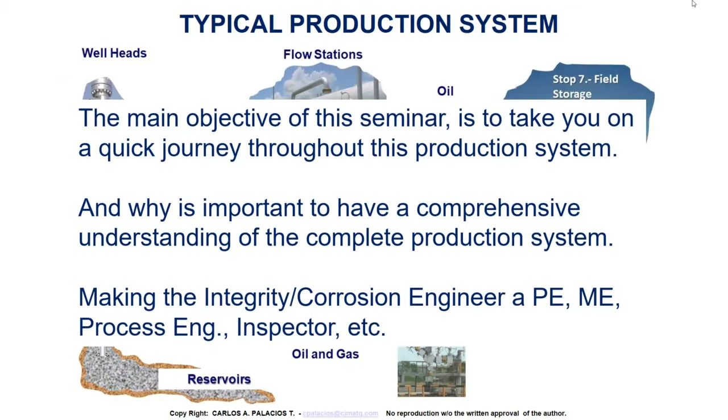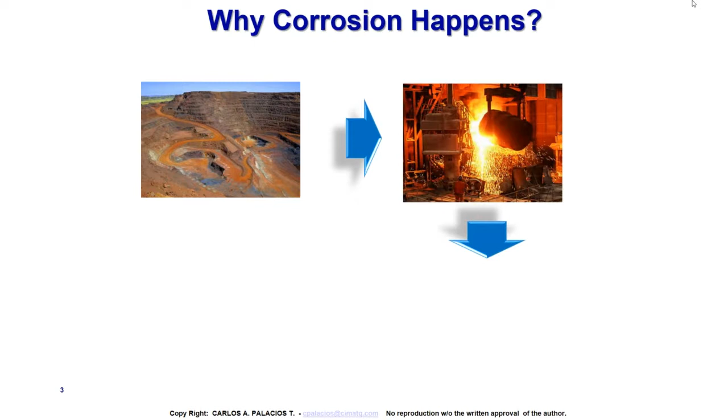So why does corrosion happen? First of all, corrosion is a natural process. It happens because we take iron ore, which rests in nature at its lowest energy state, and then we put a huge amount of energy into it to produce a piece of pipe. That piece of pipe is full of energy, presented by charges on the surface of the material, internally and externally.

So when we think about energy - if I go to a piece of pipe and hammer it, that place where I hammer it has a higher concentration of energy, and that area is going to start corroding faster than the rest of the pipe.

When our drilling friends are jogging pipes together, the areas where we damage the pipe are where corrosion is going to start. Then we have the tubing - corrosion happened, why? Maybe we can't do anything about it, because of how we're turning the pipes, or because the pipes are beautifully transported in trucks and then dumped in the field. Every location that pipe hits a rock is an area where corrosion will start, and we won't know it, because we don't have exact tracking of how things happen.

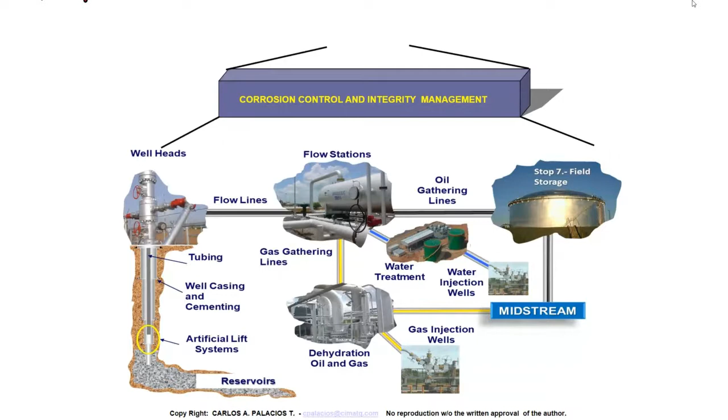So think about energy. Corrosion is an electrochemical process - we have a lot of electrical stuff and chemical stuff, and they both compensate each other. Electrically, a bunch of things can be happening, but if it doesn't happen chemically, they balance each other out.

One of the things we have to do, as I always say, is have a helicopter view of the system. If we wear blinders trying to tackle what happens in this gathering line, maybe I can't achieve it - I'll spend a heck of a lot of money. Looking upstream instead, I could focus on how that separator is operated, because I may have water in my oil line due to bad separator operation - liquid carryover in the gas stream, and liquid carryover with water means corrosion. So looking upstream is always important - that's why the helicopter point of view matters.

So ideally, you blame it on the guy upstream. If you're here, you blame the operator. If you're here, you blame well services. And if you're here, you blame the reservoir. So we go back to the reservoir - but we need to understand what's happening there. That's where our journey starts.

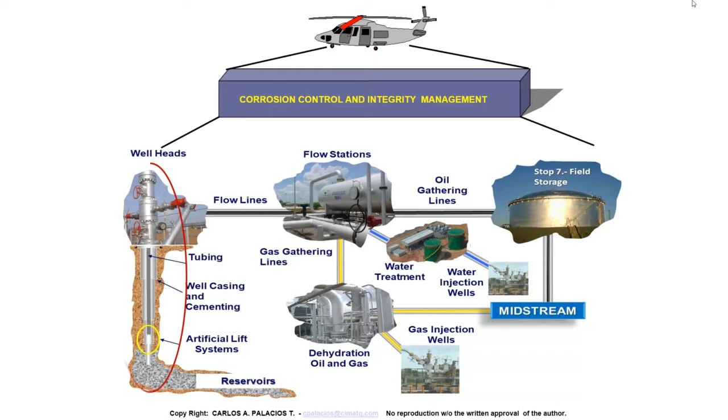Starting at the reservoir, well completion and well operation - that's one of the things we look at for well integrity. At the end, the word integrity means a lot - it means working as an integrated approach, as we were discussing earlier. In many companies, well services don't even talk to maintenance on the flow lines, or to the operator on the flow stations. They all work in silos.

I had the opportunity of working with the DOJ, the Department of Justice of the United States, due to the failure of the pipeline in Alaska that happened in 2006.

One of the things that operating company was doing—we all know who they are, but I'm not going to mention it—is they were working in silos. Our objective through the DOJ was to see that they follow an integrity recipe, because it was part of the court ruling, since they went to court.

So they would follow an integrity process and work together within each department even. So when we talk about integrity, we have to think about what happens from the point of view of the organization, starting with the reservoir. The reservoir characterization is important for us corrosion engineers, because we need to know how you guys are managing the reservoir. What are you thinking about it?

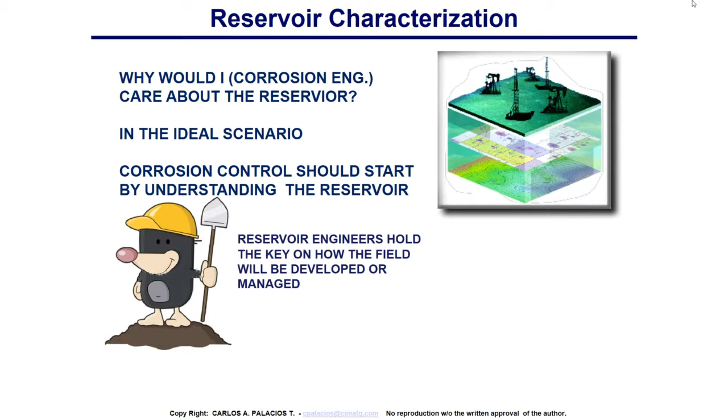Why would I care? Because in the ideal scenario, corrosion should start by understanding the reservoir. How do we manage that reservoir? How is it going to be developed? Because whatever you are thinking down there in your little cocoon is affecting whatever is going to be on the installation. How you develop that reservoir is going to affect the installation. Are the installations prepared for what you are thinking?

So let's inject water to increase productivity—then how about integrity of the installations and corrosion issues? And then all of a sudden, well, what integrity? What corrosion? What are you talking about? Yeah, we've got to be thinking about what's going on. How is that reservoir managed?

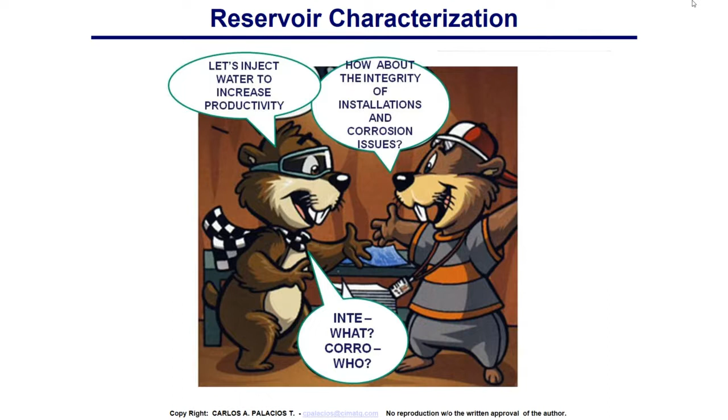Have you ever thought about a corrosion engineer sitting next to the reservoir guy, to see how things are? What is he thinking? What is he envisioning? And will those installations be accepting of whatever he's envisioning? Never—you never think about that. But that's where things have to start.

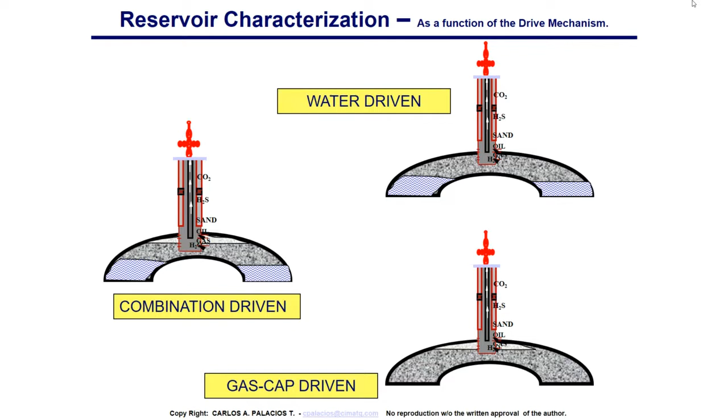So when things go bananas, then you go, help, what am I going to do? Maybe it's too late, maybe not. So for reservoirs, we need to understand whether it's water-driven, a combination, or gas cap. Why? Because I want to know when water starts in my completion, when the water is going to be in my completion, what's happening in this area, from the point of function of the fluids.

Is it a saturated reservoir? Is it undersaturated? Is it gas or retrograde condensate? Why do I care about that? Well, because if it is a saturated reservoir, what's going to happen? From the get-go, right here, I may have issues of corrosion, because now I have free water with free gas and oil.

When I am in undersaturated conditions, the oil goes in, maybe in an emulsion with the water, but still the gas is entrained in the oil. So the corrosion is going to be a little bit controlled. But somewhere along, I'm going to have the bubble point, and somewhere along, I'm going to start having corrosion. So I need to know where I am in my reservoir to see how I approach it from where I am.

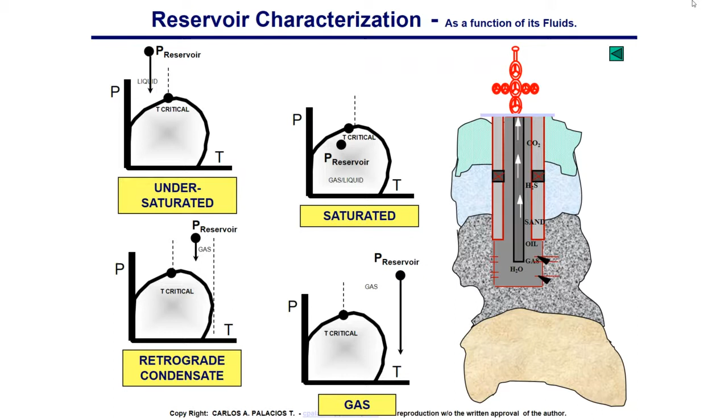Or by the fact that the well is declining, I can be moving from an undersaturated to a saturated state. When is that reservoir going to reach saturation? Because when that happens, I, as an integrity person, need to be aware of that.

So here are some examples. We have a declining curve, what is expected production, and as I just mentioned, undersaturated—but as I go, it becomes saturated, and then I have corrosion issues.

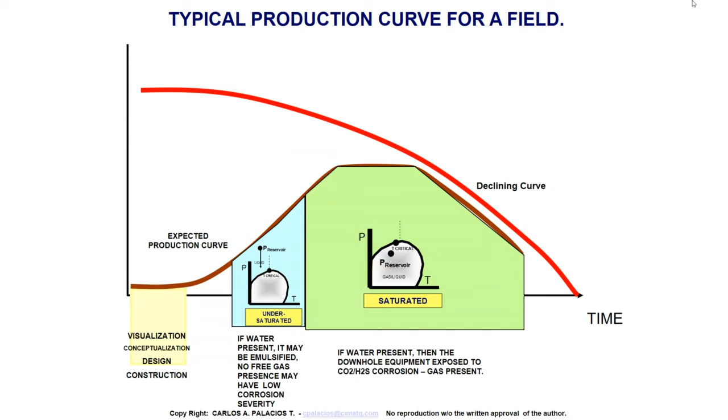Same thing from the point of view of the characterization of the reservoir. So right here, when we sit with the reservoir engineer, in the visualization stage, is where we can control corrosion more as we develop this field. Because we know that this may never reach there—reservoir engineers do their best thinking, well, I'm going to reach this production. That means that we as engineers have to define facilities to carry this huge amount of oil.

But it turns out, oops, the reservoir guys made a mistake. It's not going to reach here, it's reaching here. Now I have this huge pipeline, a huge separator, and I'm going to have huge issues of corrosion. And that's what I need to know, because from the get-go, I can control even if I have a 36-inch pipeline with only 3 or 4 barrels of oil. I need to know that.

So as we move from the point of view of water, as we move in time, I need to see where that water gets into the completion so that I can take action. So that's basically what I stated before.

So that's all I have to say now for the reservoir. Now we move to the completion part.

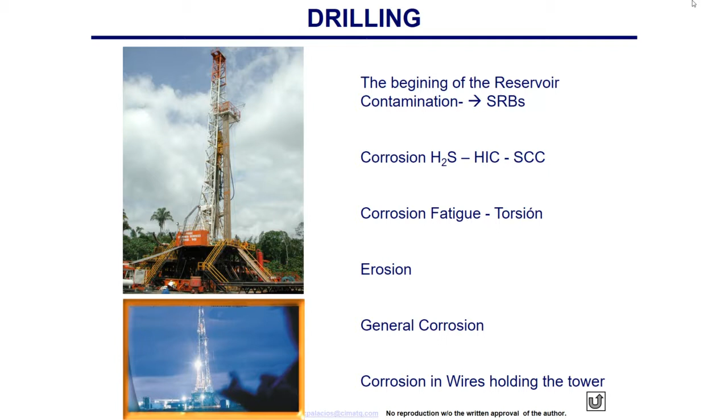So, I mean, this is all I'm going to talk about drilling, but in drilling, all that equipment is exposed to a lot of corrosion, a lot of external corrosion, and then I put that drill in there and I have a failure. What happened? Well, let's see the history of where that pipe is coming from.

Cementing, well, from my point of view, cement is the first barrier that we have for the casing. I mean, if we look at concrete structures, reinforced concrete, the rebar in the concrete is well protected because of the cement outside.

The pH of the cement, similar to the cement we use in the oil industry, is around 10 to 12 to 13. At that high pH, the rebar, the casing passivates, and therefore corrosion is somewhat controlled.

But what is the quality of this cement? Is this cement completely all the way around my casing? I don't know. So that is the first barrier. What is that quality? Because much of the cement is going to be exposed also to aquifers, so is that quality going to be protecting the casing externally?

Okay, then when I have the cement all the way to the perforations, I perforate, I'm cracking the cement, and I can have corrosion around the perforations. Okay.

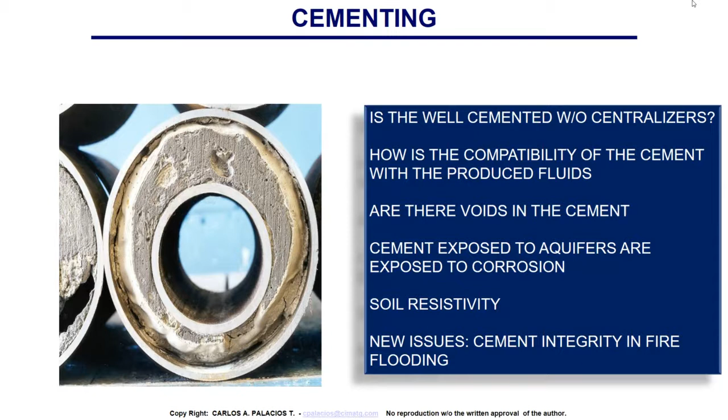Of course, outside I could say, well, I can protect it by other means. Here is an example of a casing. This is the cement, and what you see here is the wellhead.

This happened in the north of Peru, in an area called Talara. In 1999, due to the El Niño phenomenon, there was a huge mudslide. And that mudslide carried mud, and of course, there was a well here with a sucker rod that went with the mudslide. So whatever was left was this cement, and this is a close-up of the cement.

The question is, was this cement cracked before the mudslide? Because if it was cracked, corrosion is going to be happening underneath. Same thing happens in Florida on our bridges, or in the US in general. We use salt, and salt depassivates the steel, creating corrosion, and that's why the bridges and infrastructure in the US are in terrible shape. It's because of cracks in the cement that corrosion starts happening. So the question from a well perspective is, how is the integrity of my cement? How well can I qualify that quality of the cement?

I'm talking about SRB, but there are many other types of bacteria. So some of the challenges include lack of correct water treatment pre-fracking. We normally use acids, gels, friction reducers, surfactants, but how about for corrosion? How about for bacteria or scaling?

I know there is some research from some companies in Odessa where, in the proppant, they are using biocides embedded into nanoparticles so that when they go into the fracking, as they are producing them, the inhibitors will be working for a longer time. That's an ongoing evaluation.

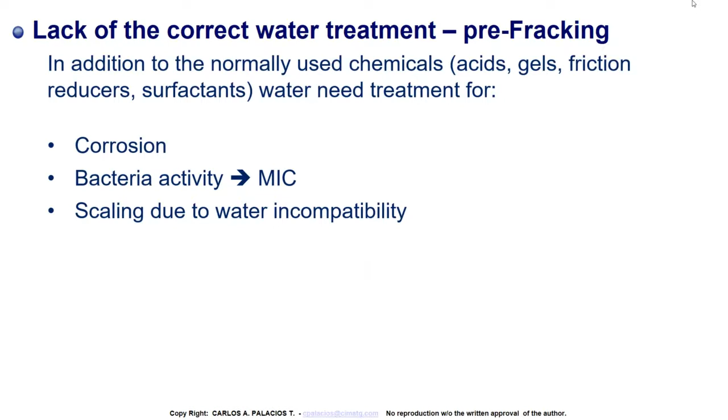And this is before we inject the water into the wells. So the challenge is correct water treatment. In addition, on the fracking side, I can treat the water very well - I can use an oxygen scavenger.

But then we go into the mixing table where we mix the water and the sand. That is open to the atmosphere, so oxygen gets in. Then we inject it into the reservoir and we have a lot of corrosion issues. Perhaps oxygen is what I'd worry about less, because it eventually gets consumed - but as it gets consumed, corrosion is taking place.

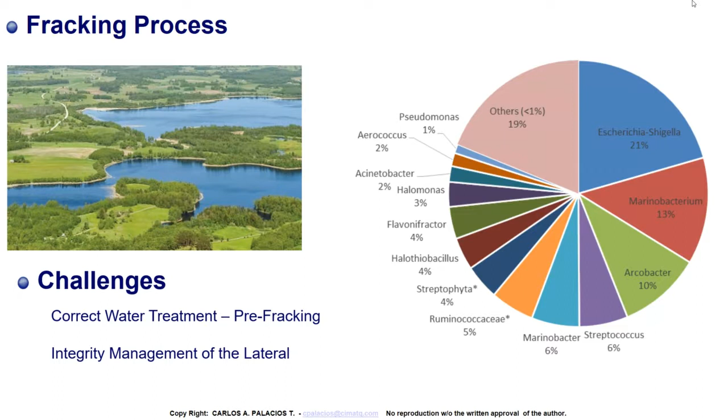So that's a little bit on the well completion, okay? And I could keep talking more about it.

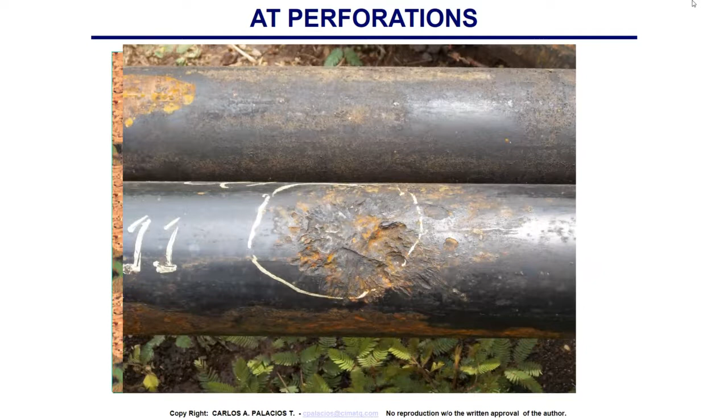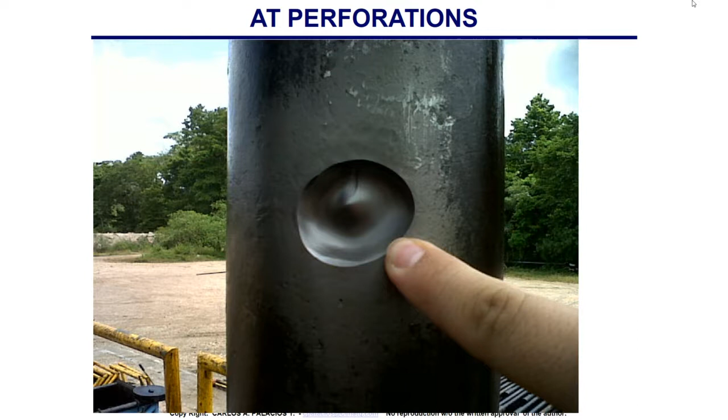Then on the wells - well, we mentioned perforations. Here is an example on an unconsolidated sand, right in front of the perforation. That is textbook erosion, right in front of the perforations on an unconsolidated sand. Look at that - textbook 90-degree impingement, with a little peak in the center because of the way the sand was directly impinging there. You can even see it follows the perforation profile of the different holes.

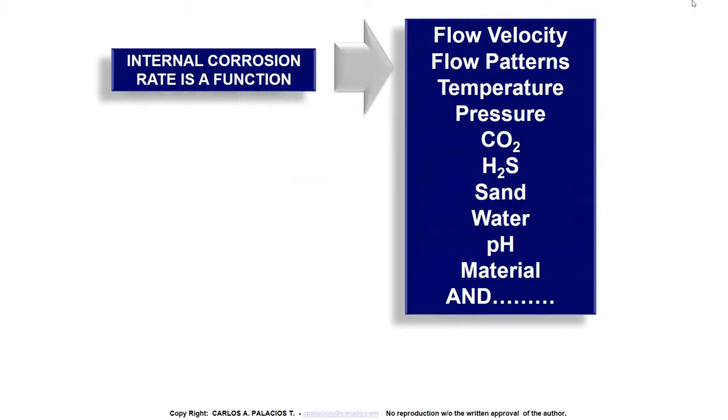I do apologize for not using precise nomenclature, you petroleum engineering guys. So for naturally produced wells, when we think about internal corrosion, these are just a few of the variables that affect corrosion - I counted 36 factors.

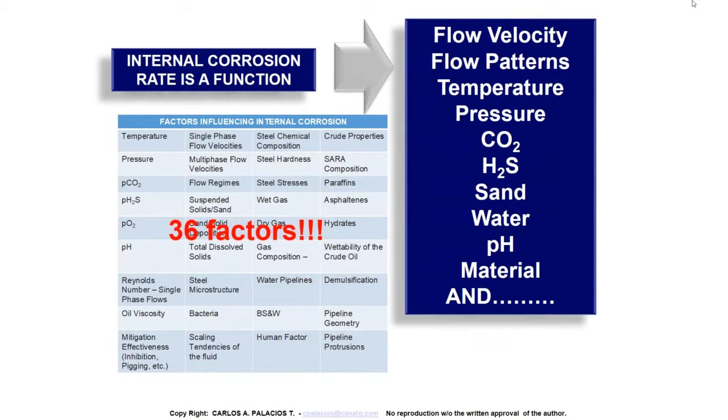Put that in a mathematical equation to predict corrosion - it's like what you guys do for reservoirs, because you've got so many variables to characterize a reservoir. In corrosion, you have 36 variables that affect the corrosion rate. Try putting that in a mathematical equation - it's impossible, because then there's asphaltenes, and oil from the same field but a different formation is a different type of oil. It's very difficult. So when we do predictions of corrosion rates, since we don't have true mathematical modeling, we need a lot of experience input.

So here is, for example, part of what I was mentioning - it's very important for me what many of the production engineers do.

All the variables that they use to do their production engineering optimization: pressure gradients, temperature gradients, velocity gradients, superficial liquid gas velocity, flow regimes, because those are the minimal parameters that corrosion is affected by.

Then I may have this type of corrosion behavior on a specific well, and from the bubble point onwards, because below the bubble point, all the gas is dissolved in the crude oil, and corrosion is basically negligible. Once the gas starts liberating at the bubble point, corrosion starts.

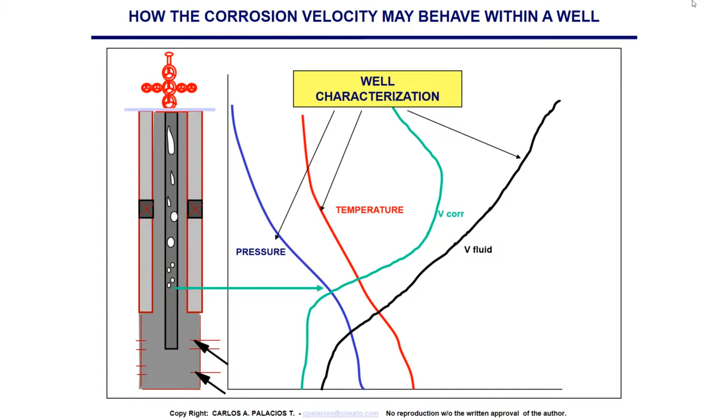Of course, with water. Outside the refineries, water is the main element for corrosion to happen. No water, I don't want to say no corrosion, but I say negligible corrosion because I don't believe there is never no corrosion. Inside refineries it's a different mechanism, but outside refineries, no water means negligible corrosion.

Here is an example of the flow modeling. This is a typical flow modeling. Here we have the water dew point, and this is data from a caliper tool that they did in one well in Peru in 2005 that I did some work on there. See, all gas.

At the water dew point, we started seeing this was mist flow. We started seeing corrosion. And then as we go, this is the profile of the well. As we go in this one, the flow regime changed from mist to slug because of the inclination. Look at the high corrosion rates, here almost 80%. It was a well that had a leak.

Okay? So this is production engineering stuff. That's why coupling production engineering with integrity is very important.

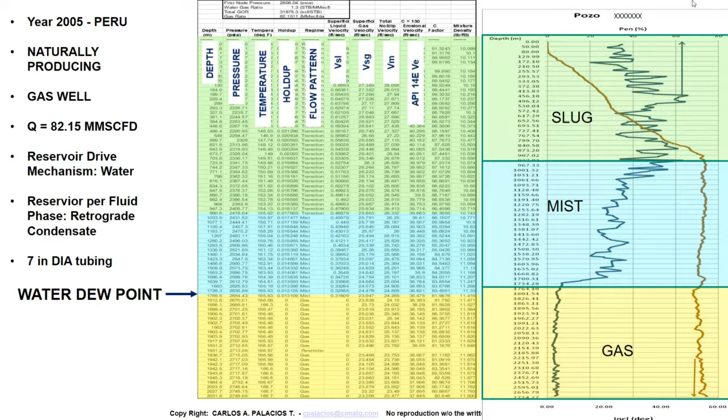Of course, as I mentioned, flow regimes -- every single flow regime has issues of corrosion. Corrosion is very much dependent on the mass transfer process. So the higher the turbulence, the higher the corrosion rate is going to be.

Even in our rod pumping units, most of the flow is churn flow. Churn flow is very corrosive because of the mass transfer -- think about this, it's a lot of turbulence, a lot of mass transfer. But in a shallow well, who cares? Let's take the rod out, put a new rod in, because it's only peanuts, but there is serious corrosion.

In horizontal wells, slug flow is terrible.

Think about the sea. When you go to the sea, you're in Cancun. Oh yes, I'm in Cancun. Now it is 10 a.m. in the morning. The sea is flat. As the day goes by, then you start seeing the wind picking up. And as the wind picks up, then you start seeing the waves. And the waves could be, after around 3 in the afternoon, after you had quite a few beers, you try to go in the sea, and then the waves will roll you. If you are with your kids, you'd say, watch out, it's going to roll you.

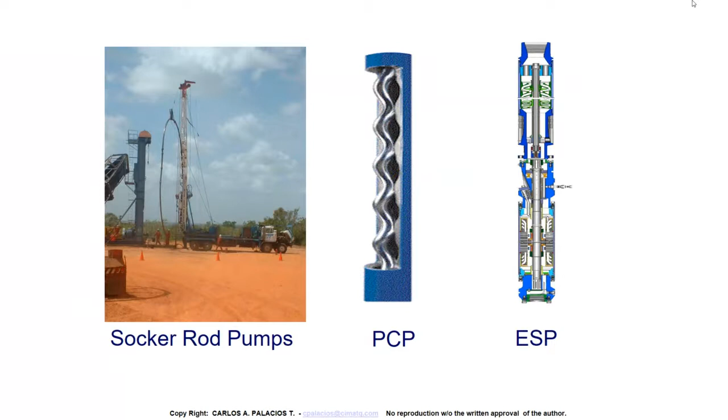So from the point of view of production methods, as I mentioned, there are sucker rods. I'm not going to have time to go through all of these, so I'm only going to concentrate on the top 3. Okay? Sucker rod pumps or PCP pumps.

In the sucker rod pump, we have a rod going up and down. As the rod goes down, it moves in counter-current with the fluid going up, causing higher turbulence. And in the coupling areas, there is a restriction of the cross-sectional area, resulting in higher velocity and higher corrosion rates, on the rod as well as in the tubing.

How about the gas in the annular space? This is wet gas. As we go up, water vapor can deposit in this area, affecting the internal corrosion of the casing or the external corrosion of the tubing.

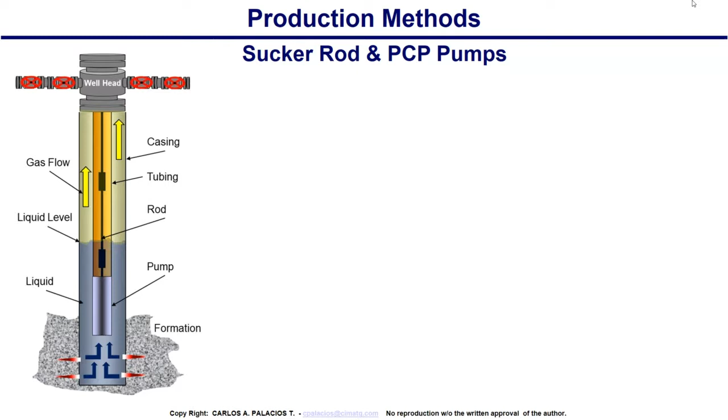How about through the pump itself? Through the traveling valve to the static valve, there is a lot of corrosion because of restrictions, and it comes with sand. This is a pump that, due to the drawdown, is going to be pulling sand also. So the sand is going to influence the corrosion rates. Okay?

So that's what I mentioned, also oxygen ingress through the stuffing box. This is key, maintaining this stuffing box, because this same action of the rod can pump oxygen into the well. Or in many cases, production engineers say, let's open the casing to atmosphere to reduce the pressure, to increase productivity.

But the thing is that this level moves. When it moves down, you are sucking in oxygen. When the level moves up, okay, so if you have a breathing well, now you have oxygen in, oxygen out, oxygen in, oxygen out.

Oxygen is the worst corrosive agent that we have in nature. It is 80 times more corrosive than CO2 and about 400 times more corrosive than H2S. Oxygen is the worst. Lucky for us that we don't have oxygen in the reservoirs.

We are lucky. But if we have oxygen in the reservoir, it's because we put it in there through the water treatment. Some of the water treatment we're going to talk about, we've got to be careful not to get oxygen in, because during the water treatment, much of the equipment is open to atmosphere.

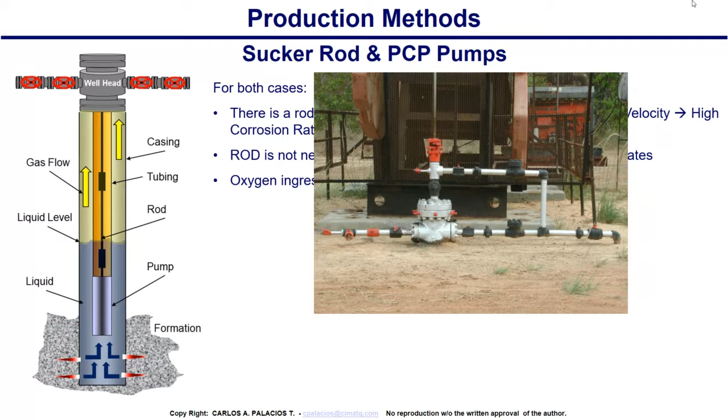So for sucker rod pumps, there are high local flow velocities at the couplings. As I mentioned, this causes high corrosion rates on the static valves on the pump, and then the rod can be wearing against the tubing.

What are you going to do there? There is no chemical that is going to help you minimize that. Well, but then we say, let's put a rotating device on the top that is going to be rotating the sucker rod.

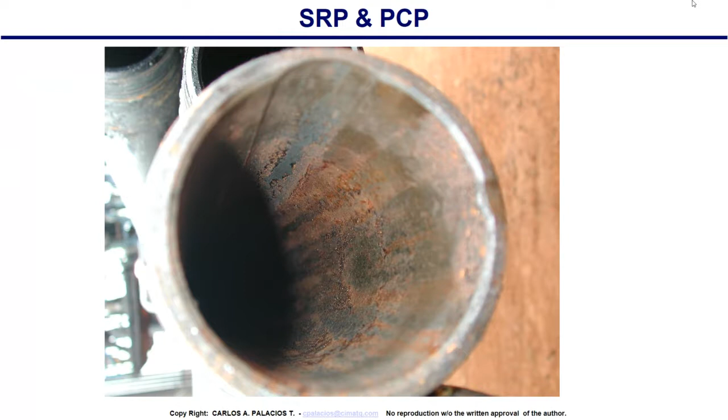That is basically buying time, because that's what's happening. I don't know if you can appreciate it, but we are basically rotating the damage all around the tubing. Okay, you are buying time, that's fine, but you are still damaging the pipe. Lucky that the rods are a harder material than the tubing, so normally it's the tubing that suffers more than the rod itself.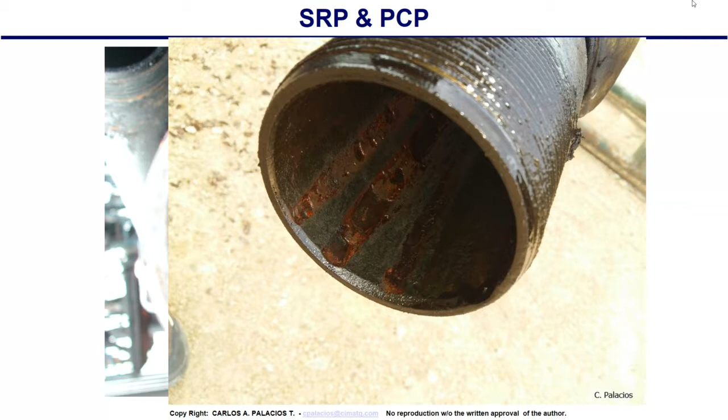Inspections, boy, I tell you, ladies and gents, when we started inspecting with this simple visual inspection of the rods, it's amazing how much money we saved the company.

Here is the company man on the workover. Okay? He doesn't care whether the rod is corroded or not. He will put the rod back into the well, only to find out that after a couple of weeks, it's going to be called back again because the well failed due to corrosion.

He's going to be very happy because he's going to have a job, a recurring job every 2 weeks, every 2 weeks, every 2 weeks. Since we started doing visual inspection of each one of those rods, taking them away instead of putting them back into the well, we extended the workover frequency from 6 months to a year, saving the company a lot of money.

Not only that, but these rods — I dare you to go to a warehouse of a company where they have the rods stored. They are just there, open to the atmosphere. Corrosion is taking place, and then you come to your well.

This is a brand new rod, let's put it in. Whoop! The well failed tomorrow because it was already corroded. Think about that in a continuous rod that is in tension. If this holder breaks, that rod goes like a spring, ready to go straight.

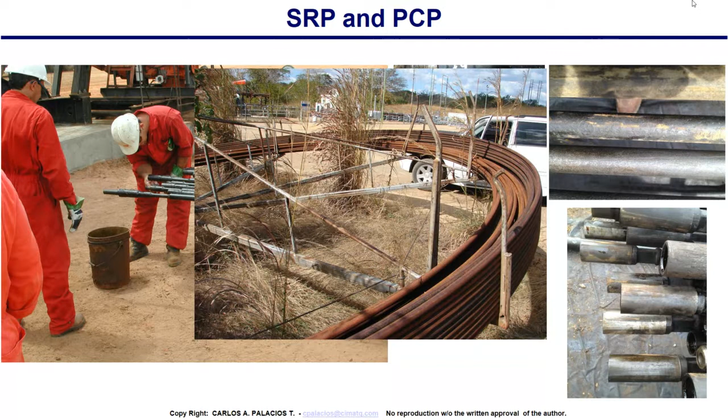That's why you have to ride a helicopter, so to speak, to understand that when you buy these continuous rods from Weatherford, which are the ones who make them, you've got to make sure that in their shop, even when they come from Canada, they are protected from corrosion in the ships, because it's going to go from Canada, perhaps running all the way through the Mississippi River, to the Caribbean Sea, to Venezuela or Colombia, and that trajectory needs to be well taken care of.

So, gas lift — is the gas lift dry? Does it have CO2, H2S?

We may be corroding the casing. In many cases we say, well, I'm going to treat it with a corrosion inhibitor, but I don't have any place, so I put the corrosion inhibitor into my gas stream. Very inefficient, but sometimes it's what we have. We don't have any other alternative.

ESP pumps, I love these ESP pumps. Here is a packerless well, so we have the motor. Of course, I'm showing here the motor perfectly centered in the production casing, but we know that's not the case. If I move it a little bit, there's a small space where velocities can be very high. It's a restriction, it reduces the cross-sectional area, higher velocity. That's why the motor casing is exposed to erosion and corrosion.

And scaling, because this is the hottest part. It's the fluid around that is cooling that motor, so scales can be forming on that motor. But if those scales become localized, you get corrosion under the deposit, or under-deposit corrosion.

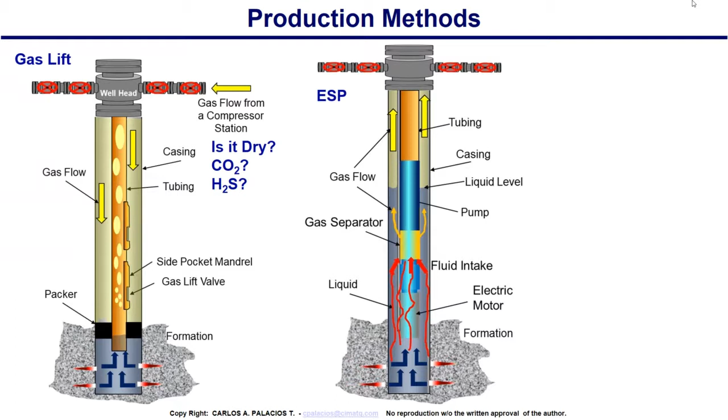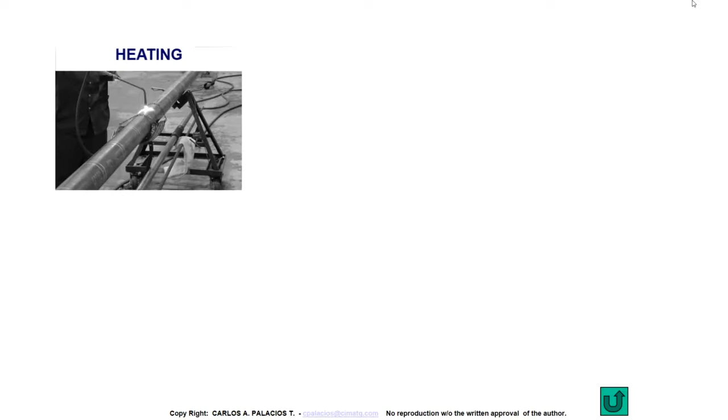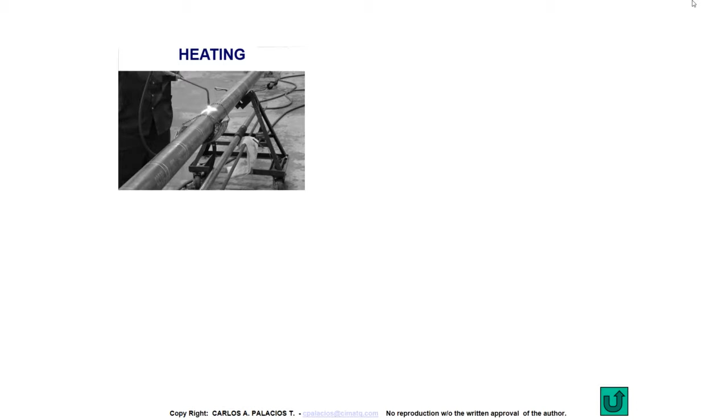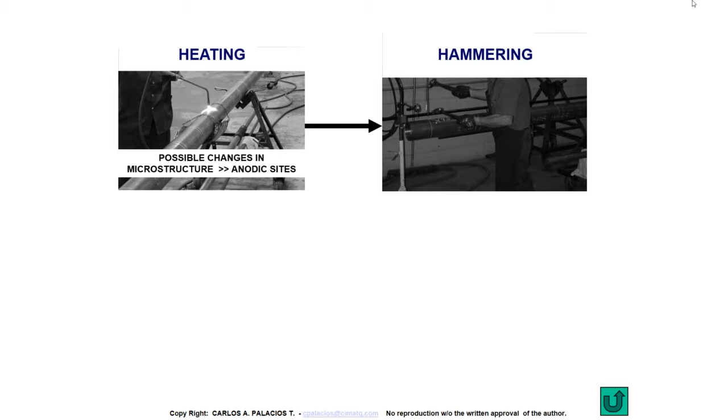They have this lady with a torch on the piece of pipe. This is a piece of pipe because internally they build the pump, they build the motor, they build the separator—they build it all. So they have the torch. Why do they do that? Oh, because I want to straighten the pipe. Okay, right. Then it goes to another department—this is an old guy with a hammer. When it goes from here to there, they've already put the stators inside the casing, inside the piece of pipe, and this guy with the hammer is hammering away to align the stators inside the tube.

Look what they did—you see the marks of the torch here, and look at the marks of the hammers right there. I mentioned to you at the beginning, if I hammer a piece of pipe, that is an area where corrosion is going to start. And lo and behold, this is a highlight of that—see the torch marks plus the hammering.

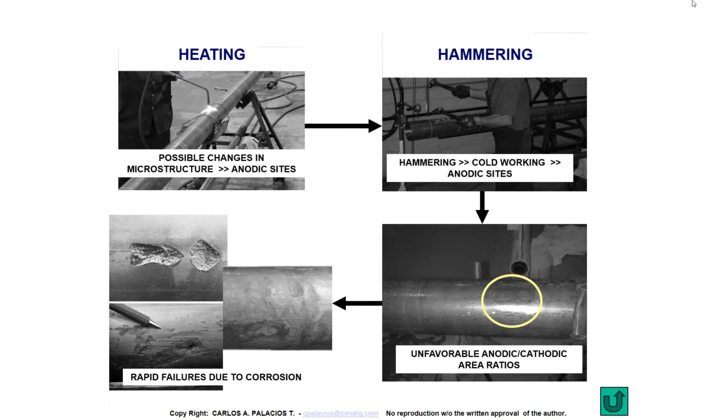And this is how we get the corrosion. What a casualty. Of course, here comes this guy from Venezuela telling those guys how to do the manufacturing of a pump—how can you do those things? You are damaging the whole structure. Of course, other manufacturers don't do that, but these guys were doing it. We even had to recoat with special metallic coatings all this stuff, and it didn't work very well. See, this is the highlight—very deep. And there was a leak of oil from the motor.

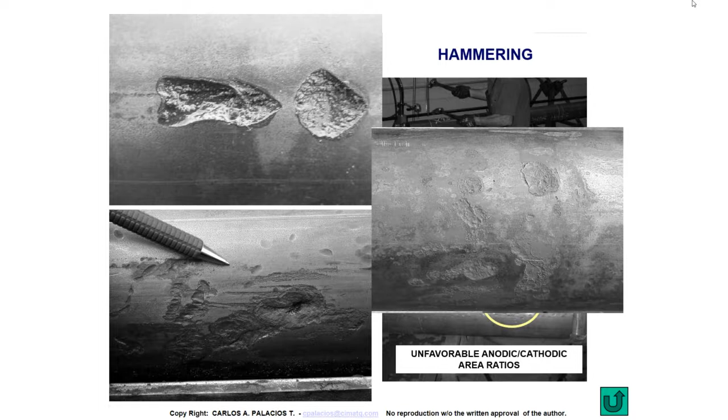Okay, I hope I'm not boring you. I don't think so. Just, if you need some toothpicks, I have a bunch of toothpicks around here, so if you need some.

So then, drilling guys, completion guys, whenever you do a completion of the wells, please put a capillary string down there. It doesn't matter whether it's not going to be used today, but eventually it's going to be used. And it's not true that you can convince management, once you're in production of a well, by saying, hey management, I need a workover to pull that tubing out because I need to install a capillary string to treat downhole. You know what management is going to say? You are fired.

So please input it from the beginning in the completion. When you do a completion, design it with the proper location to put capillary string downhole. I'm doing some consulting job for a company in the Middle East. Every single well in this particular field has been completed with a capillary string downhole. They are not using it right now because they are producing zero water. I don't believe that either, but they said it's zero water, and they don't have any corrosion issues. But they know that eventually they will because they are injecting water. So they have the completion ready for that.

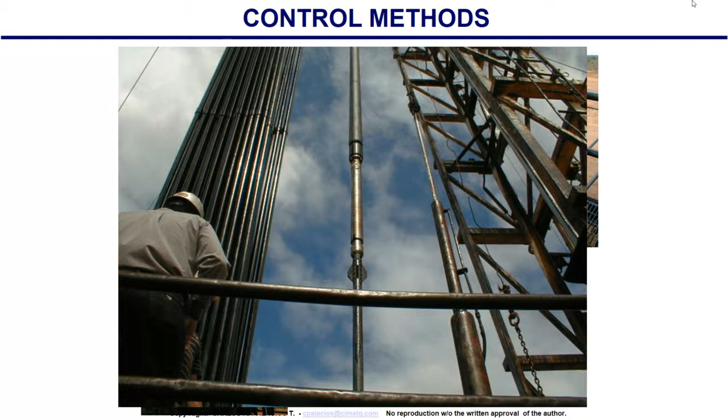So please, it doesn't cost a lot more. This is peanuts compared to losing a completion, losing a well. And at the bottom of the well, use a dispersion device. Chemicals work, ladies and gents. Corrosion inhibitors work. Scale inhibitors work. Paraffin inhibitors work. Asphaltene dispersants work. But you have to deploy them correctly. So please complete your installations with capillary tubing.

So, see, here is one case. This is the capillary. They have a little check valve and an elbow right here. Of course, one of the things when you leave this like this, without a specific dispersion device, is that the solids coming in here can make that check valve fail in the open position. When that happens, the fluid going through it behaves as a pitot tube effect and sucks all the chemicals from the surface. So on the surface, you also need to have some proper devices so that won't happen, because that happened in many cases, and I would blame the chemical company. You didn't fill the tank today. I filled it yesterday, well today it's empty. Well, it was because of that type of effect.

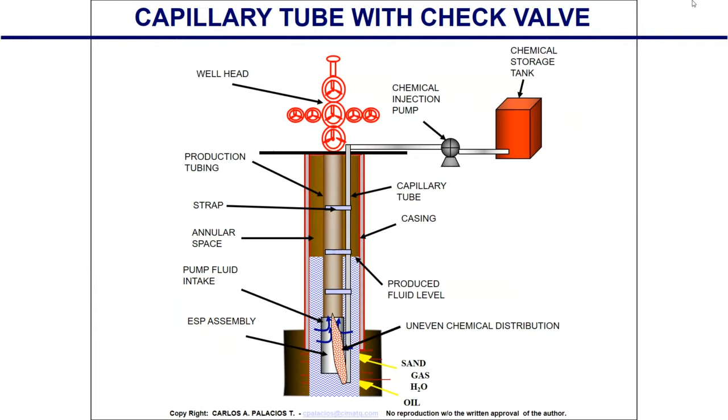And here, for ESPs, the capillary tube already comes with the same armature as the electrical cable that goes to the electrical motor. So they are embedded in there. So don't think about it, just do it. So once again, we need a proper dispersion device because the chemical may channel, and you may be thinking, well, I'm protecting my equipment, and not necessarily. So that's why, because this is what may be happening. And then scaling can be happening because it's not mixing properly. So that's why you need a proper mixing device here so that the chemical mixes. And that's the key for every chemical to work: proper mixing.

And don't ever do this, ladies and gents. I'm going to treat it on what they call the backside. The backside means in the annular space. Of course, you need the well, first of all, to have no packers. But doing this, the same chemicals, especially asphaltene dispersants, are extremely corrosive because they have very low pH. Biocides have very low pH, some around 2. Corrosion inhibitors may have low pH too, but it's a corrosion inhibitor, how can it be corrosive? It can be corrosive. Scale inhibitors can be corrosive. So any chemical that we take can be corrosive.

And then, let's assume that it's not. Are you really going to think that I'm going to have this magic chemical that is going to go all the way in countercurrent with the gas, going down? When it reaches the water, it's going to disperse in the water very finely until it goes here and then up the tubing. Ah, come on, it's not going to happen. And this is what may happen from the corrosion point of view.

Lucky for us, it happened very close to the surface. But if it happens even further down, then you lose the casing. And then repairing a casing, I don't know, you guys know more than I do. I understand that sometimes you have to kill the well. Sometimes you may repair.

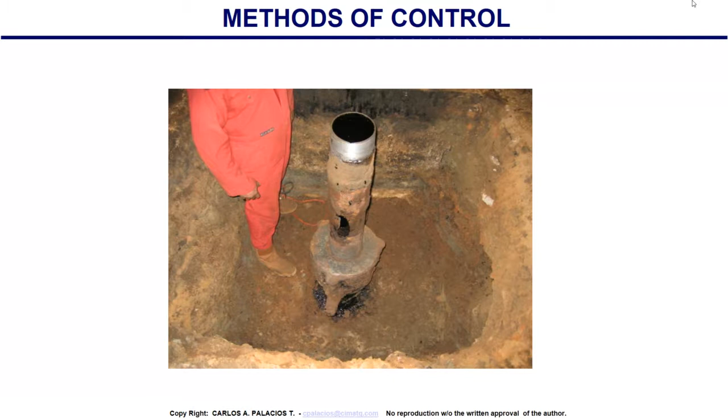So it's important to have a dispersion device. So we need to complete wells properly, as I mentioned.

Corrosion resistant alloys, ladies and gents, they are not immune to corrosion. Corrosion resistant alloys work very well within the specific integrity operating window.

I have a well with no H2S, use 13 chrome, no problem. But now the well started to become sour. Say goodbye to your 13 chrome, because the H2S and 13 chrome, they don't like each other.

Or the salinity changes, if there is an increase in the salinity. Salinity is the enemy, chlorides is enemy number one of any corrosion resistant alloy. So they have their own integrity operating window within which they work very good. But that doesn't mean you can sleep at night saying, okay, I'm not going to have corrosion anymore. Things change. Souring of the well, water changes, things change.

Even duplex - hey, our friends from Oman, if you look at the installations there, beautiful duplex all the way around, from the well to the surface, beautiful. And they have a lot of issues of corrosion on the wells.

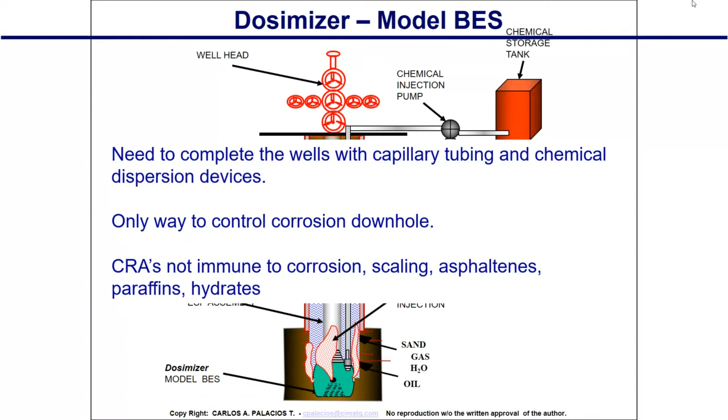So in that specific case, when you are welding that, you are removing that passive layer. Externally, it's not an issue because you come back and refresh it and rebuild that passive layer. But internally, how do you do that? So now you have a beautiful material, expensive, and still you have corrosion.

So wellheads are the most hydrodynamically unfriendly equipment in oil and gas operations. It's just a bunch of valves. This is truly 90 degrees, and then we have the chokes.

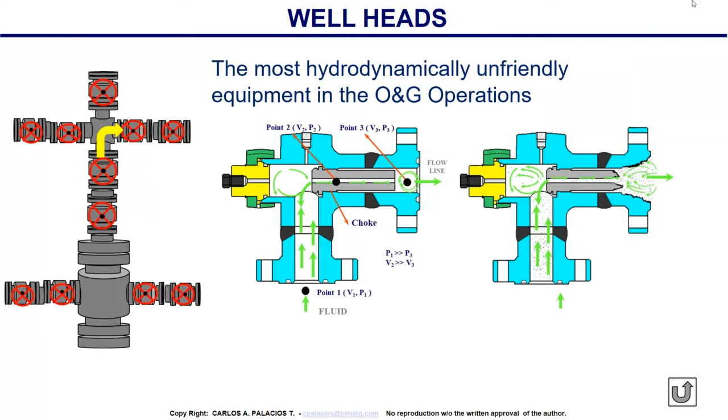And depending on the conditions of the chokes, hey, we had wells with 10,000 psi here, 12,000, 10,000 psi and 1,200 psi downstream of the choke. Imagine the huge velocity across the choke - Mach 1 velocity. No matter what you do there, it's going to destroy the chokes and the choke box, as we see there.

And even the choke box, that is a massive amount of steel. This choke, like that, it goes anywhere, and then you have a mess there.

Multi-phase flow line, now I'm out of the well. Beautiful challenge. This, in my experience, was one of the biggest challenges to manage corrosion - multi-phase flow, because of the hydrodynamics in them, the turbulence, and sand, and bacteria, and water.

So in that particular field, they came up with a wonderful idea: let's have a centralized processing facility for the oil. Here it is, this is the centralized processing facility. We have a multi-port valve here collecting fluid from different wells from this area, and then from this area, and then from this area. A 16-inch pipeline.

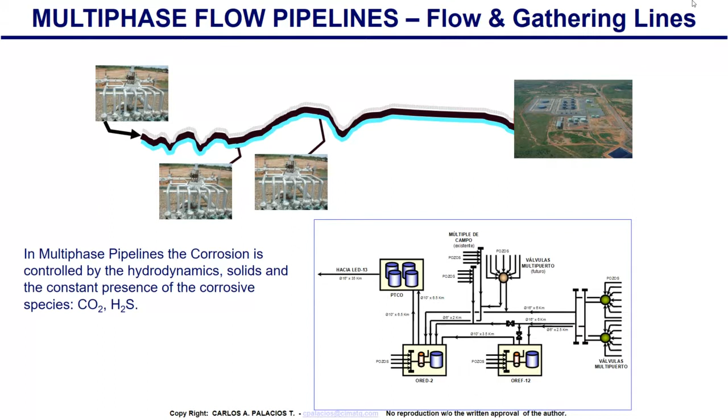So sometimes you gotta play the doctor and listen to the flow regimes on the pipeline. So really, this is just to listen, to corroborate if the modeling was correct, by listening to the frequency of slugging going back in the pipeline.

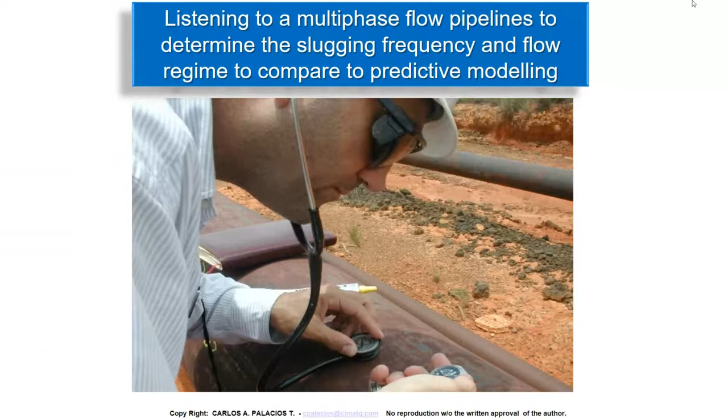Things to consider that are flow related: the effect of emulsion, and wettability. Who's wetting the pipeline? Is it the oil or is it the water? Very important. I remember when I was a student here, Dale Peters - I don't know if he's still around - he had a project looking at the hysteresis of the crude oil and the wettability. This is big now. There is huge research going on right now in PRCI, trying to understand and come up with equations to predict the wettability.

Here is the case, remember that mention about slugging? This is in Alaska, a 36-inch line. Due to a slug, and in Alaska all the pipelines are above ground because of the permafrost, and insulated, a slug just knocked it down from the supports. So that tells you the huge mechanical issues of slugging.

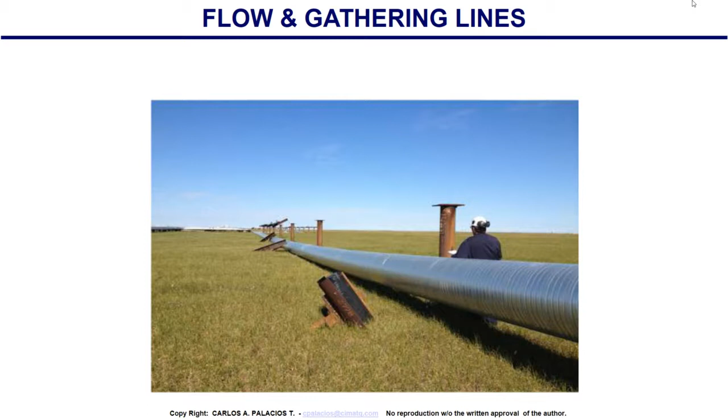Alaska is a particular deal because when they designed the field in Alaska, production was very high at that time. That's why you have these huge pipelines. They all insulated their lines because of the cold weather. But you know what they didn't do? They did not coat underneath the insulation. Guess what is the biggest trouble Alaska has right now? Corrosion under insulation, not even internal, corrosion under insulation. They didn't think of it because they said, well, Alaska is an Arctic dry environment. Yeah, but they forgot that the snow melts in summertime. And if the jacket is not well protected or has defects, water gets into the insulation, causing corrosion under insulation.

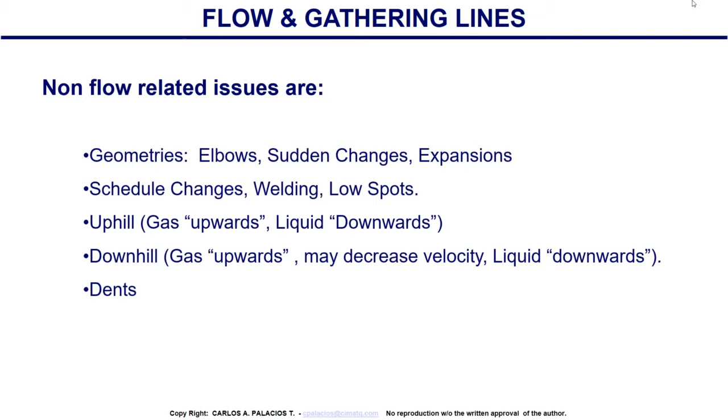Geometry is very important, we were talking about turbulence. That's why when we are designing systems, that's where we have the most powerful tool in the design to control corrosion. Avoiding elbows, changes in schedule, uphill, downhill, dents.

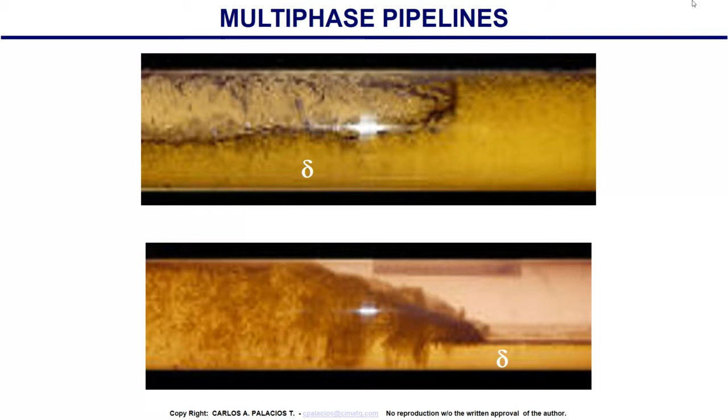Look at the turbulence. Think about when you go into the sea, there is a wave. What does it do? And the further you go down, the wave passes by, not an issue. But if you are close to the shore, the slug film thickness is like this, there is no way to hide, and you'll see how the sand is all shook up. So that means the fuller the pipeline, if I have a slug flow, from the point of view of mass transfer on the bottom of the line, is better because there is less mass transfer than if the slug film thickness is smaller.

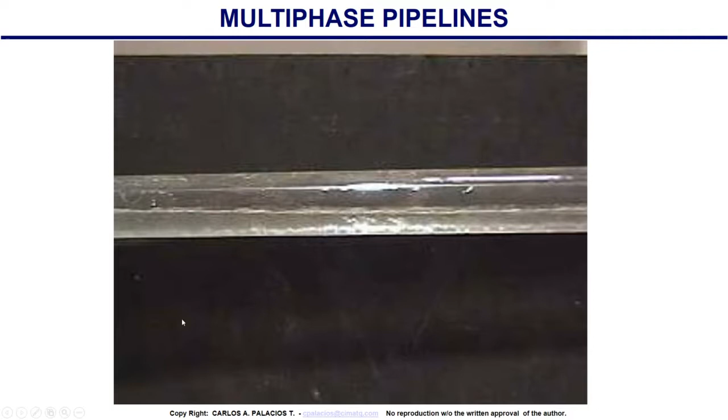Simple things like that. Here I quickly want to show you, I don't know if I'm going to be able to get this going. Well, it's not going to work. Well, this is a video of a slug, it's not working.

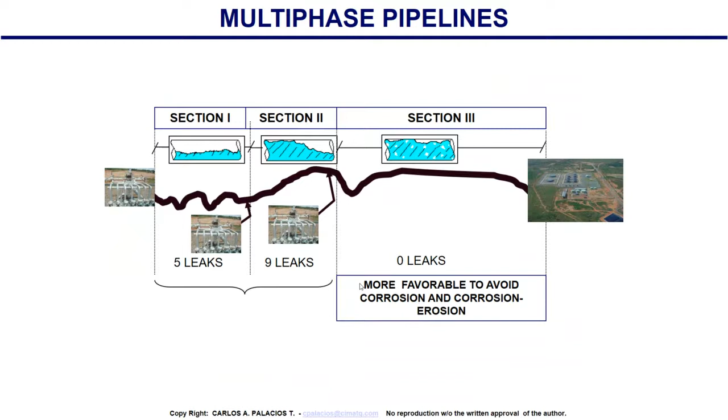So I mentioned that's the type of corrosion. See, this is 9 leaks, 5 leaks, 9 leaks, 0 leaks, in that line I mentioned before. It is the type of corrosion that we saw.

Here we see, which direction do you think is the flow? Is the flow out of or into the screen? Towards us, to look into the screen. Look at the shape, U shape, U shape, U shape, pointing in that direction. So that's one morphology that helps you identify, depending on the U shape that you're forming. So it's going into the screen.

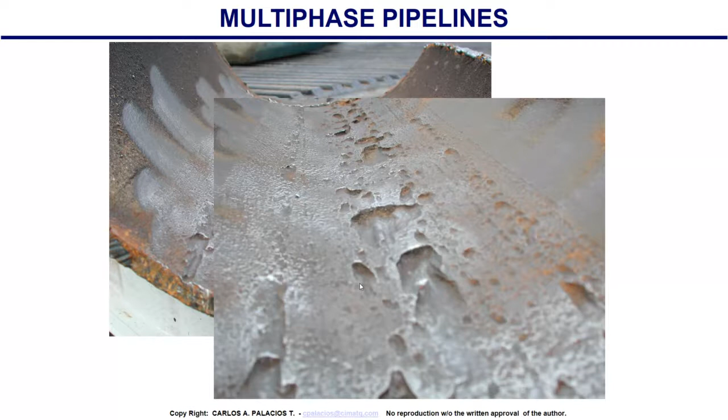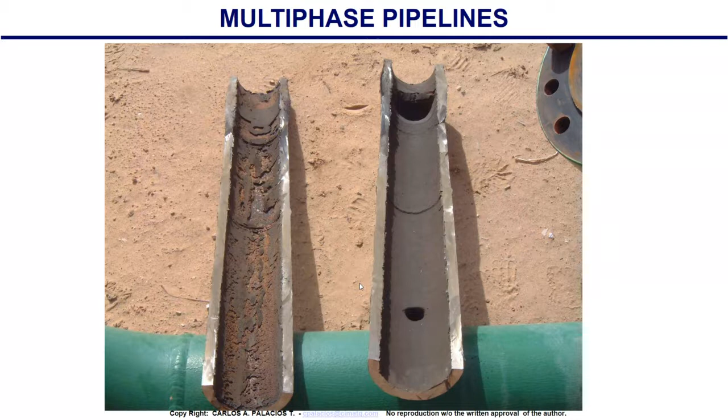Here is a highlight, here is another. It is very difficult when you have a dead body like this one to say, okay, what did he die of? You need to do the autopsy, you need to do the proper research. Yes, madam, it's true. Because if I look at that and say, well, this happened because of that corrosion, that's not true, it's impossible. However, there are certain morphologies that can lead you to believe one way or another, and one of them is this one. This is very typical of CO2 corrosion. However, you cannot conclude until you have all the evidence.

Right, tips to conserve the mechanical integrity. So the most difficult equipment is multi-phase flow. Constant pigging, scraping is key to maintaining the integrity. Brushing your tooth to avoid bacteria.

Many chemicals: biocides, scale inhibitors, corrosion inhibitors, surfactants. Maintaining the pipeline as full as possible. Avoid oxygen ingress at all times. Avoid the ingress of fluids from pits, meaning open pits, discarded oil.

Pigging is the most important thing to maintain the integrity of pipelines. Pigging doesn't necessarily mean that you are removing a corrosion inhibitor—they would not. But normally we increase the corrosion inhibitor.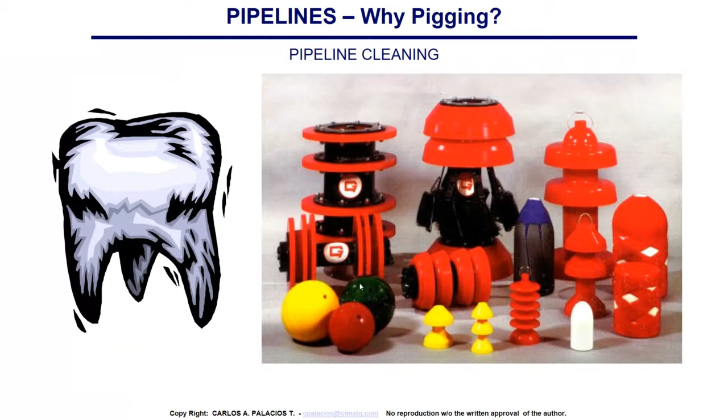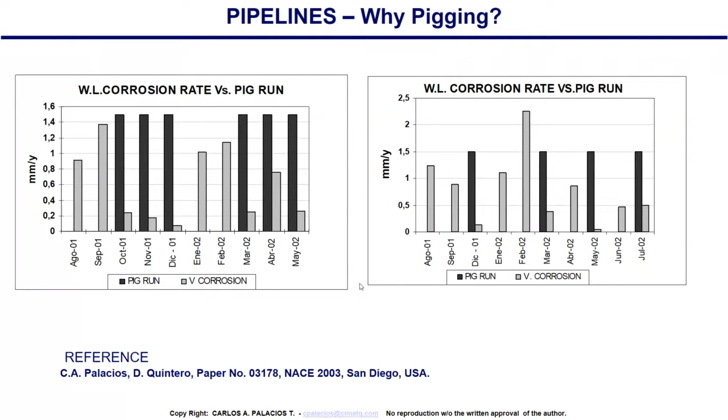Here is an example of why pigging matters. Every one of these dark bars represents pigging. Here, without pigging, there's a high corrosion rate. Once they started pigging, low corrosion rate, low corrosion rate, low corrosion rate. They didn't pig this section, high corrosion rate. So pigging works to reduce the corrosion rate.

This is an example from Campos Basin in Brazil, in the north part of Rio de Janeiro. Of course, they were pigging not for corrosion purposes, but for liquid loading. They had a lot of liquid in the gas lines, which was affecting production upstream, so they used a lot of spheric pigs to remove the fluid.

As a matter of fact, the correlations used in PIPEPHASE for this type of pigging came out of the TUFFP projects, because there was a Brazilian guy working on it. That wasn't during my time, if I remember.

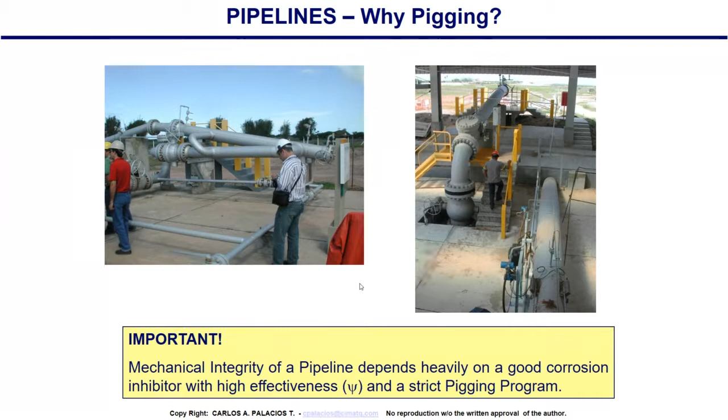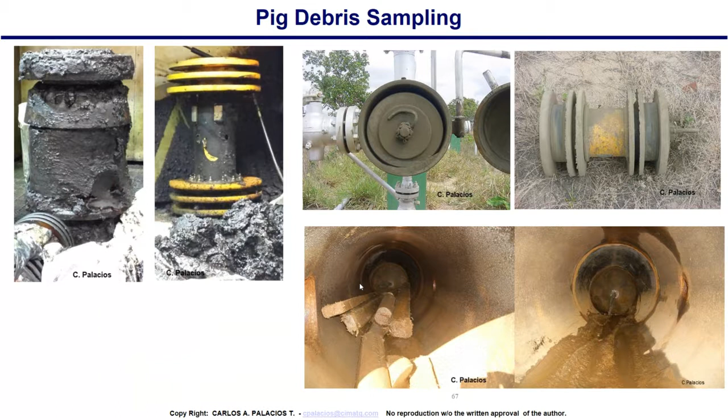This pigging is very important, because if you were pigging normally, this debris is what you want to collect and analyze, to see if you've got bacteria, to see what it is that you have.

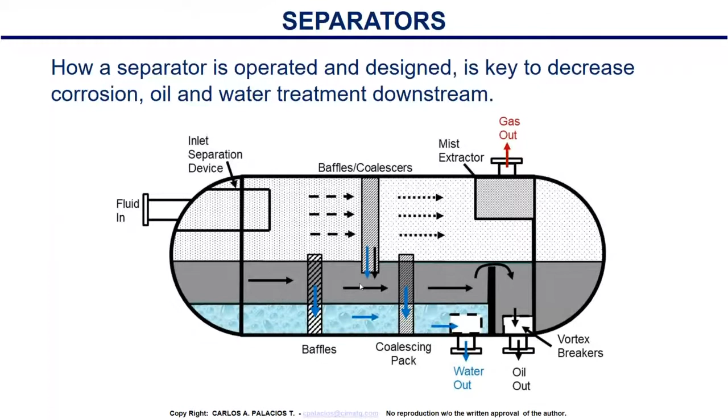Okay, so quickly, flow stations—I'm going to go quickly because I think I'm way out of my time. We go back to the separators. Why is the separator so important to maintaining good operation?

If we increase the level, or we have sand in the separator, the level increases. If the water level rises, there is more water into the oil—I don't like that. If the water level rises, the velocity of the flow is higher, then I'm going to have more oil into the water. We don't like that either.

And if this level rises, I'm going to have higher velocity through these baffles. The baffles won't collect the mist of the liquid, and I'm going to have liquid carryover, because I've reduced the cross-sectional area. So therefore, I have issues of corrosion. That's why we need to focus upstream as well, as I was mentioning.

So, pipelines: we have in the world about 92 times the amount of pipelines needed to go around the earth—92 times, more than that, because this data is a few years old from when I did the research.

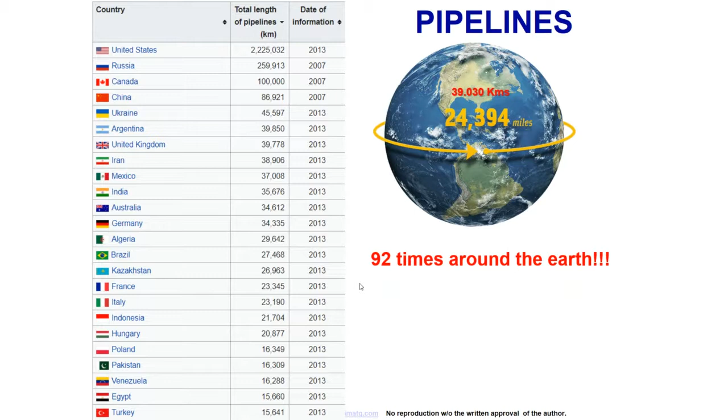70% of those lines are not piggable, because we said dry gas, dry crude oil—but there is no such thing as dry gas or dry crude oil. That's the misconception behind why they're not piggable.

Here is a failure that happened in 2000 in Carlsbad, New Mexico, that killed 12 people. It was a dry gas line. Dry gas means somebody upstream is dehydrating that gas, removing the water vapor.

What is the reliability of that plant upstream? Can I trust that it's going to be operated 100% correctly, or that the operator, one time, does something like shut it down because he dropped the phone on the shutdown switch? Hey, it happens. So I cannot rely on dry gas being free of corrosion.

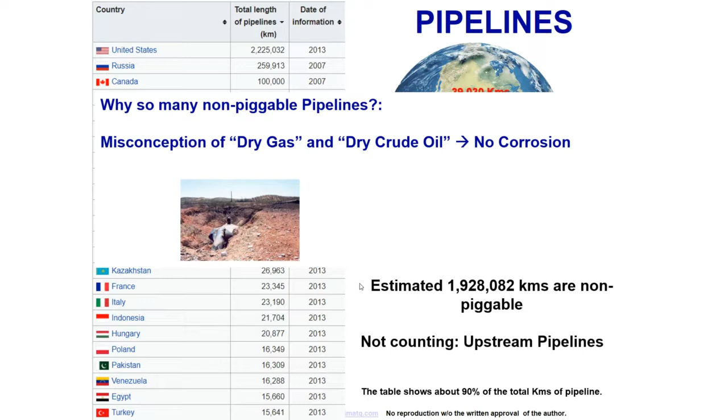Dry crude oil - this is what's happening in Alaska. What is the definition of dry crude oil? Less than 0.5 BS&W. BS&W stands for basic sediment and water.

Okay, but if I am producing 400,000 barrels of oil, that is 2,000 barrels of water. Is that water going to be in an emulsion? I don't know, because that depends on the characteristic of the crude oil. In Africa, there are some crude oils that only with 5% water, just as the oil spits them out, not necessarily in an emulsion. So it depends on the characteristic of the crude oil.

And we have the leak, and this leak happened due to microbiologically influenced corrosion. Bacteria by itself - I mean, does anybody here cook?

Anybody makes bread? What do you use to make bread? Yeast. And you keep the yeast in your refrigerator, or you buy it in the supermarket. That is bacteria. You put it in your hand and they don't jump, they are there, right? And that bacteria becomes active when you mix it with water. And when you mix that yeast with water, why is the bread lifting? Because it's producing CO2. So the bacteria may not be active until they see the water.

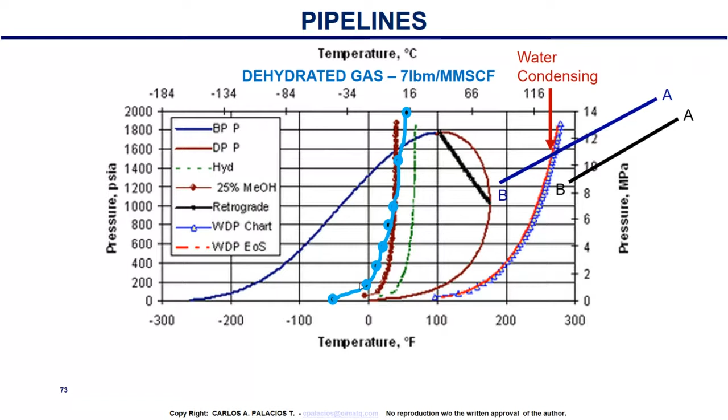And see the beauty of the flow modeling - I know where this can be happening, then I know exactly where corrosion is going to start happening. That's the beauty of the flow model that you guys use in the oil industry. Water condensing right there, and I can find that out. That is the beauty about the hydrodynamic simulations.

Scaling tendencies - why? Because they depend on pressure and temperature, pH, paraffin, because of the cloud and pour points, temperature dependent. And then I know the temperature behavior throughout my whole field. I can know my velocity throughout my whole field to see if I have erosion or corrosion or both, or asphaltene formation, because that is very much dependent on pressure.

Through a colloidal instability index, for example. Hydrate formation - I hear you have here a hydrate research facility. Hydrate depends on pressure and temperature. So beautiful - I mean, we have beautiful tools.

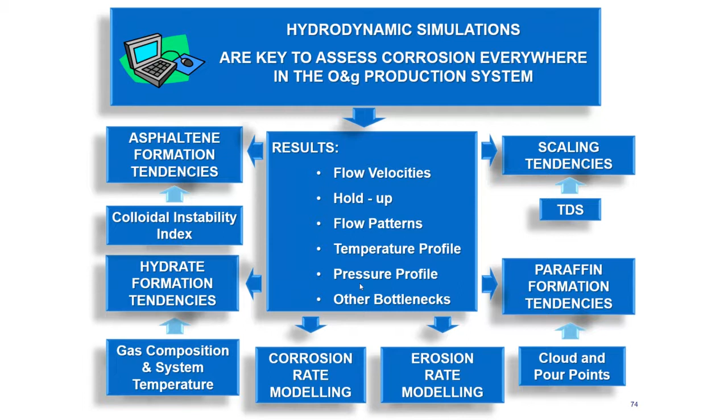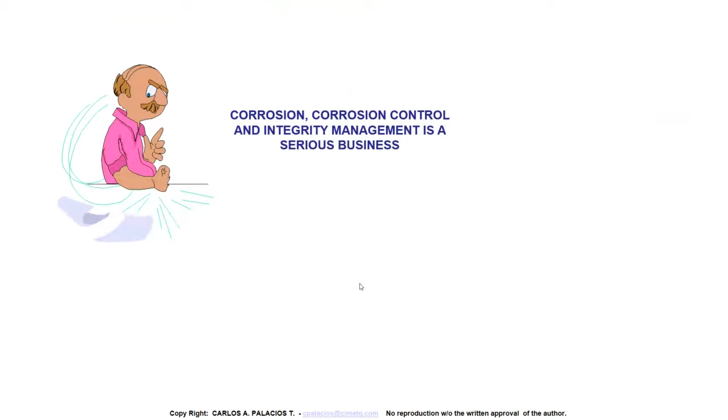So, is this the end of the journey? Or is it? Because then we have another beast further downstream, and that is refineries. That is another world and another journey. And we only discussed internal corrosion - external corrosion is another journey. So, it's a serious business. Thank you for your attention.

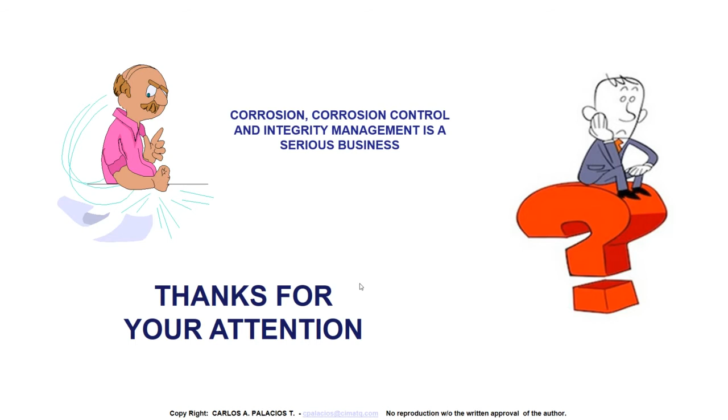I think that's a cost. One of the things you will check is the presence of things like NOx, SOx, right? Those types of things as well, the influence of impurities on the corrosion rate. Well, in a lab type of setting, yeah, you can do it. But remember, you have to have a clean lab. But that's what I'm saying, in a lab, you can do that. And in the mechanical engineering department, when I did my thesis, there were some autoclaves, okay? Those autoclaves should be somewhere.